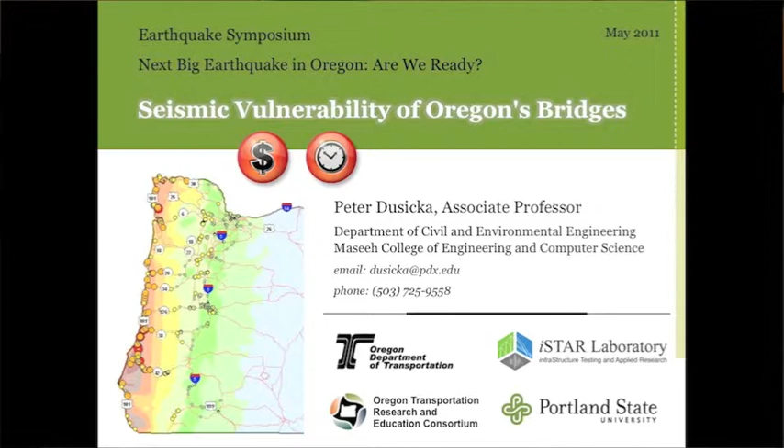Before I get going, I just want to make clear that even though I'm going to present some results of research that has been sponsored by various people, whatever I say is completely my opinion, and I do tend to be opinionated. So don't hold them responsible, hold me responsible. And I also have a series of graduate students and undergraduate students behind me who essentially did most of the work anyway.

All right, so I think in order for us to understand seismic vulnerability of bridges, we first need to understand the importance of bridges. So I'm putting up a slide of an example of the role that bridges play in our transportation system.

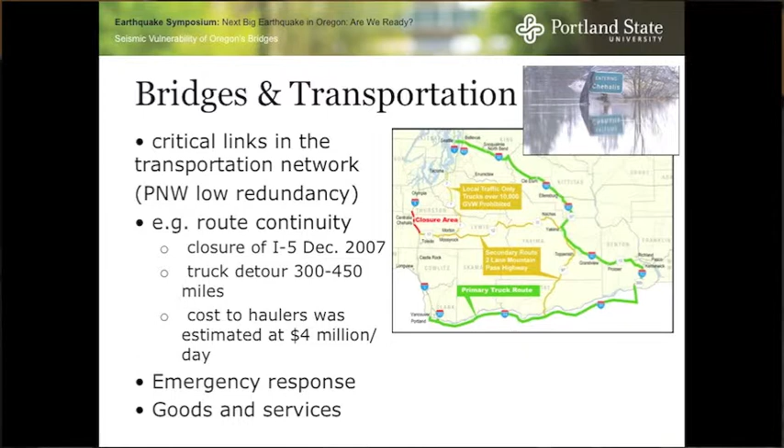This particular example is from about 4 years ago, when it wasn't a bridge that was down, but a short piece of a highway, I-5, just north of here, that was down due to a flood. Just to give you a sense of the lack of redundancy in our transportation network, the closest detour for moving goods up and down north to south between us and Seattle was about 300 to 450 mile detour, which was estimated to cause orders of magnitude about $4 million a day just for the truckers.

So if you imagine the bridges being points along a transportation network, then you quickly realize that if any one of those points go down, then depending on the redundancy of the network, you may or may not, and in the case of Pacific Northwest you typically do, cause damage not only to the bridge itself, but also to the society as a whole. And clearly, bridges are important for immediate emergency response, as well as goods and services well after the event.

So now, hopefully that we understand the importance of bridges, we can talk about the vulnerabilities. And you heard Scott talk about our gradual gain in knowledge in terms of the risk, right? So if we take the risk and we understand the fact that we've learned a lot over the last few decades, then what I'm going to talk about is, well, even if we knew what the risk was.

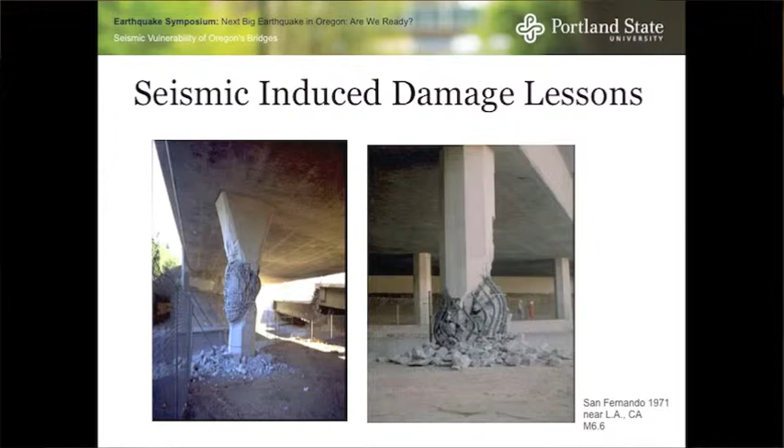But San Fernando was really a wake-up call, where a lot of the bridges got damaged in California, and it drew a few lessons for Caltrans, in that they essentially looked at the way that they design bridges, and all of a sudden there were a few lessons that they learned from it, and the seismic design has essentially steadily progressed from then on.

So some of the lessons that were learned: bridges are typically, or have been, designed for temperature expansion, right? They're fairly long structures, out in the elements, so they expand and contract, so you have these expansion joints in the bridges. Well, that earthquake really showed that if you can minimize the number of expansion joints in a bridge, the better off you are. They also learned that taller columns do better than shorter columns, and things like you end up putting steel into concrete to help it along.

The amount of steel and the position of that steel is actually really quite important. So from then on, we move on to other types of earthquakes, and being engineers, we're kind of reactionary, right? We essentially learn from every event.

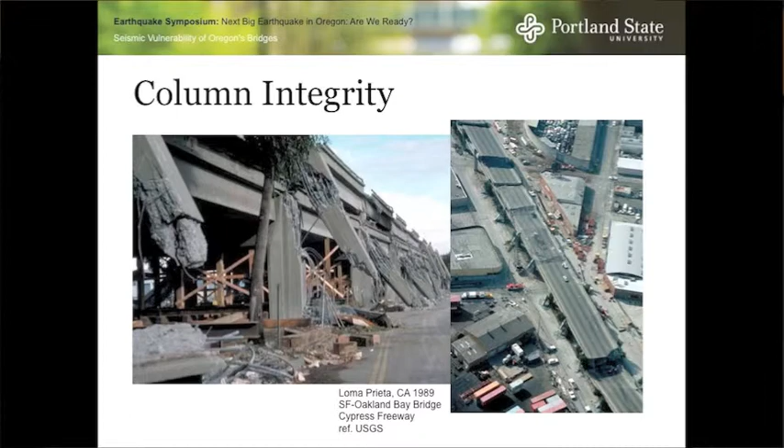But we go back to California in 1989, we had the Loma Prieta earthquake, and there we also had quite a bit of damage. We learned a lot about column integrity. Bridges tend to be non-redundant structures, meaning they have a few elements that resist things, unlike buildings that often have multiple load paths. So the column of a bridge tends to be quite important.

Knowing how to design that well really hasn't caught on until about the 90s. It took Caltrans about 10 years from 1971, another 10 years after that, to start instituting a retrofit program. So it wasn't really until the 1990s that they started retrofitting, but they've certainly learned a lot of lessons from their earthquakes.

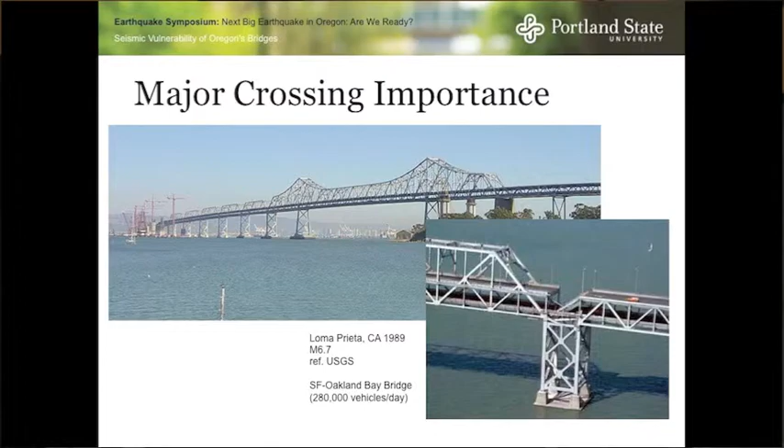They also learned quite a bit about signature bridges. Major bridges tend to be few and far between, so if one of them goes down, you have a major impact. In this case, the San Francisco-Oakland Bay Bridge, which carries on the order of 280,000 cars a day - if that's down, that obviously causes a little bit of a headache to the city.

As earthquakes continue to hit us, we as engineers who build stuff in the way of the earthquake have started to learn things. One of the things was, if we do have expansion joints in bridges, maybe we should make sure that they're long enough, because if the bridge happens to slide off that expansion joint, then results like this happen.

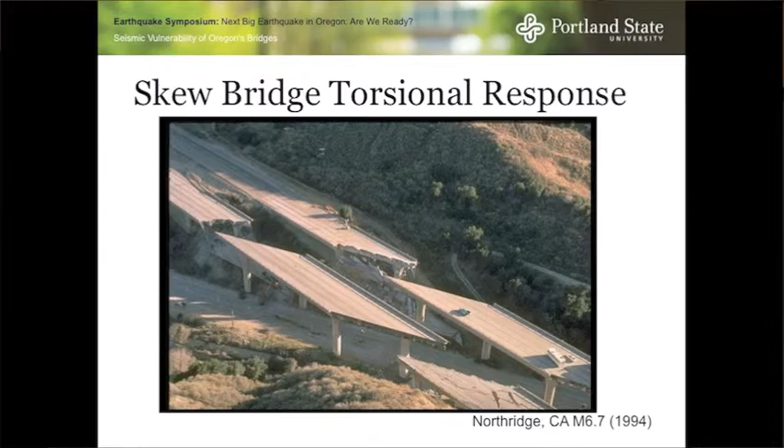We also learned things about torsional response, which is if you have an irregular structure, even if you hit it with an earthquake in just one direction, that structure responds in a different direction, just due to its own geometry. We learned that in Northridge, for example, where you have skew in bridges, which is where the bridge runs at an angle to whatever it's crossing.

We also learned through an earthquake in Japan that strength is not enough. It's not enough to build strong things when we talk about earthquakes. In fact, we now know that ductility is a lot more important - essentially the ability to absorb energy, not just to stand there and withstand it.

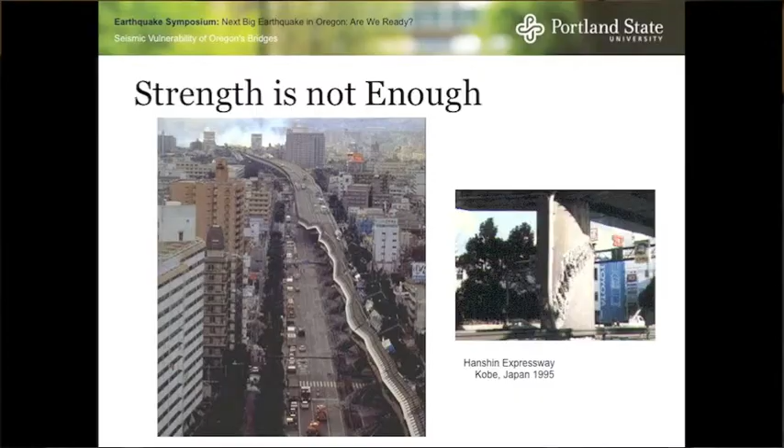And the Japanese didn't really learn that until essentially the Kobe earthquake in 1995. So what you see there is a fairly strong column, but all you need is 0.001 larger demand, and it's not strong enough anymore.

And we continue to learn these lessons, and unfortunately that just keeps going. So again, the importance of strength is not enough - the importance of understanding the structural behavior then becomes quite important.

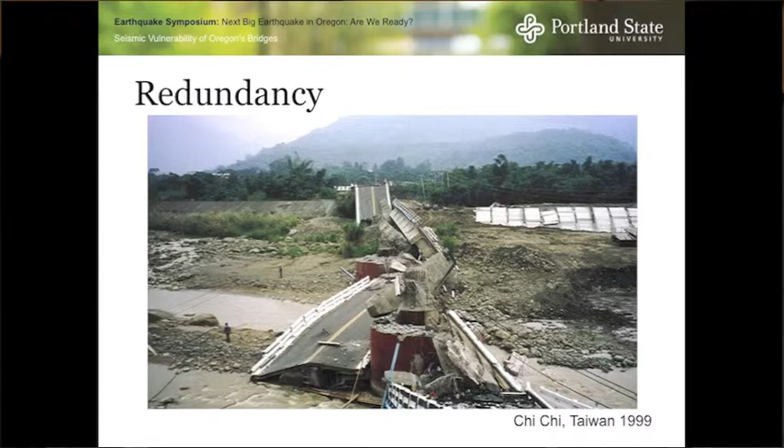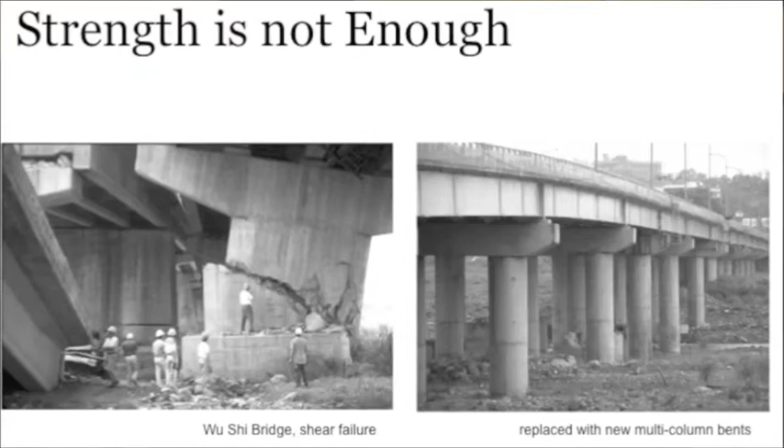The example you see there is actually from Taiwan, from the Chi-Chi earthquake. The bridge on the left is what it used to be - it was built more for strength than ductility. The bridge on the right is the replacement for it. So it may not look as intimidating, but it sure will act better in an earthquake, for example.

We also learned a lot about simply supported spans, i.e. having bridges that go from one support to the other, as opposed to having a bridge that's continuous over a lot of supports. It turns out that simply supported spans, especially if they don't have enough seat to sit on, don't particularly like being moved back and forth.

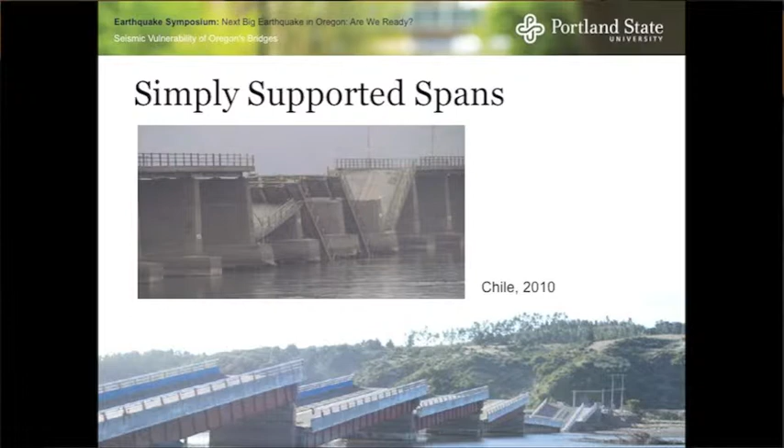There's an example from a recent earthquake in Chile, and we've seen that starting from 1964 in Alaska to essentially now. Closer to home, this is the Nisqually earthquake example. You don't need to have a collapse to cause a lot of damage. So we didn't actually have a bridge collapse in Washington, but there was a tremendous amount of damage.

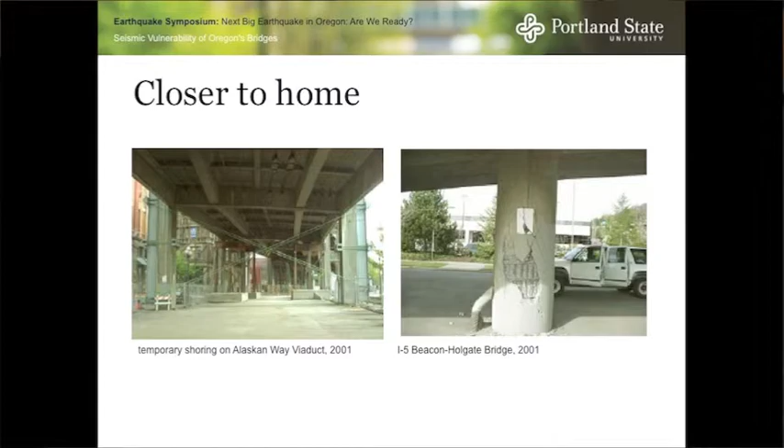This may not be common knowledge to non-engineers, but we don't build bridges, for example, to survive the earthquake and be functional. We achieve our design goal if we don't kill people. So even modern bridges are built to essentially not kill people, but that doesn't necessarily mean that you can use them afterwards.

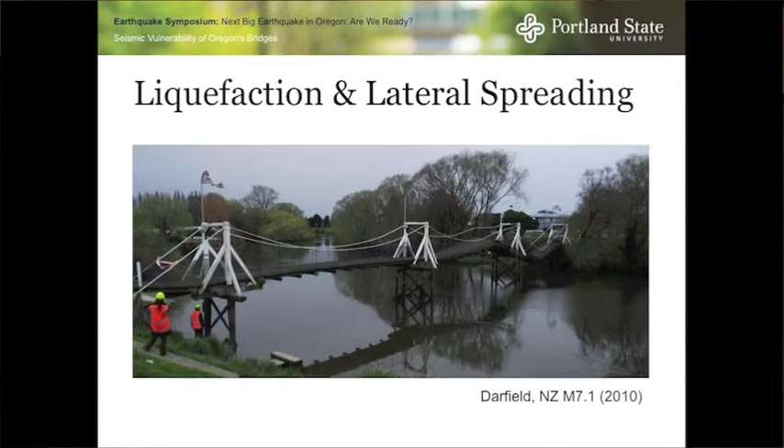Another problem is that even if we knew how to build the structures well above ground, it's also important to know what's below ground. Scott mentioned liquefaction as a major problem, and as part of liquefaction you get lateral spreading. So essentially, if you have a bridge and one side decides to go closer to the river and the other side doesn't want to go in the same direction, you get a problem like you see here. This is the pedestrian bridge in New Zealand following the Christchurch earthquake that used to be straight and didn't have any hills.

So how does that relate to us here? Essentially what that conveys is a picture of how we've learned a lot about bridge behavior. Leaving the risk aside, let's look at what that means for Oregon. If you look at the bridge inventory in Oregon, that graph shows on the x-axis the date at which a bridge was completed and the number of bridges built.

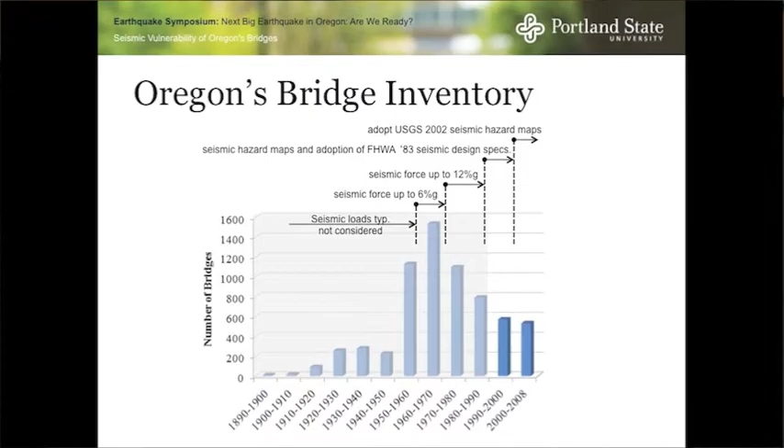You get a sense that the majority of our bridge infrastructure was built in the 60s, 70s, and 80s. If you think back about what I said regarding structural behavior of bridges, we didn't really know a heck of a lot about how to design properly yet. The little writing on top tries to indicate how much we knew and what we designed for in terms of earthquakes. It wasn't really until the 1990s that ODOT adopted fairly rigorous seismic design codes for bridges.

So that leaves the whole inventory on the left-hand side, shaded, of bridges that we own. You own them, I own them. They're there, they're being used, but unfortunately they were built before we knew what we know today with regard to designing effectively to resist earthquakes. So now we have them. Well, what does that mean?

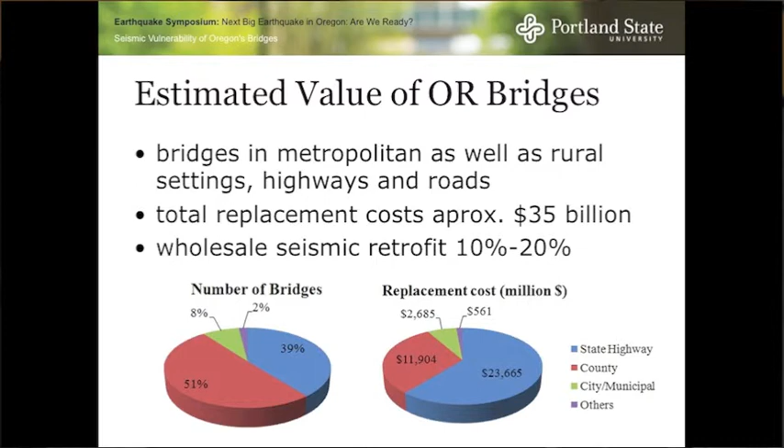If you look at the value invested in this infrastructure, the state of Oregon has on the order of 7,000 bridges or so. If you look at how they're divided between state-owned, county-owned, city, and miscellaneous, that's the first pie chart. About half of them by number are owned by county-type owners, but if you look at the value, the majority are actually ODOT-owned. So we're looking at about a $35 billion investment sitting there. If we decided to scrap all these bridges and build them again, we'd need about $35 billion to do it. So that's probably not going to happen.

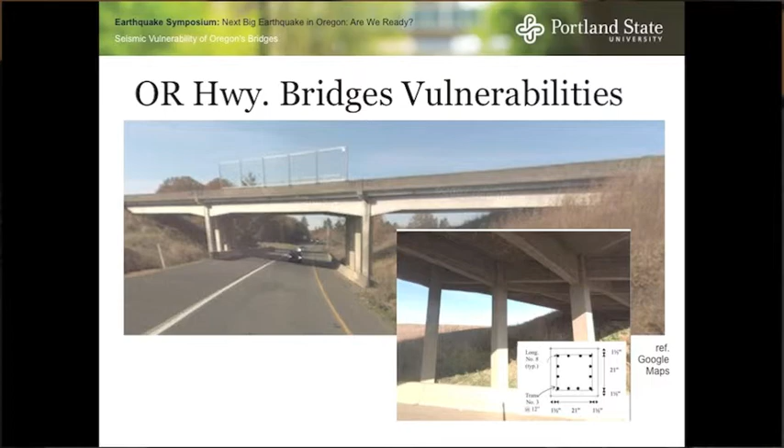So what are the vulnerabilities of bridges built in Oregon? California's way of building things is actually very different from Oregon's, so our bridges have their own vulnerabilities and idiosyncrasies. Our typical bridge looks something like this - a fairly standard highway overpass with multi-column supports. Those columns tend to be square and fairly slender.

Not at all what California builds - California builds round columns that are 6 to 8 foot diameter. The behavior, you may think square versus round, what's the big deal, but it actually has a fairly large impact on how you go about retrofitting these things.

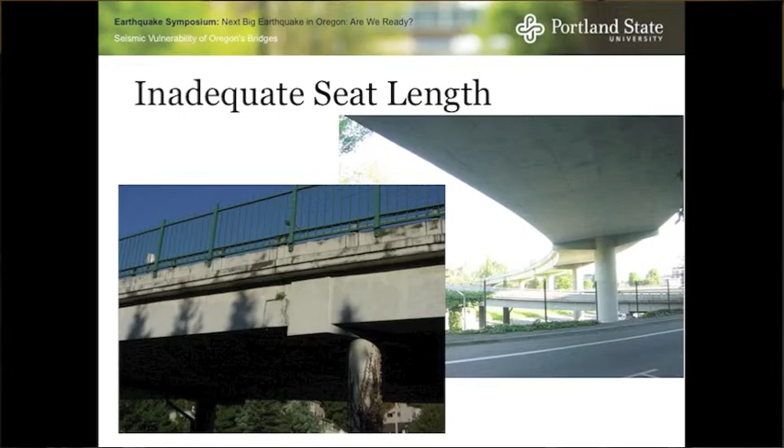We have a lot of inadequate bearings. This is an example, just on the other side of Hawthorne. If we have 4 inches for this bridge to be sitting on and be supported, and the earthquake comes in, it's not unheard of for it to move 6+ inches. So you'd need to be supported for another 2 inches up in the air, which probably isn't going to happen. That's inadequate seat length.

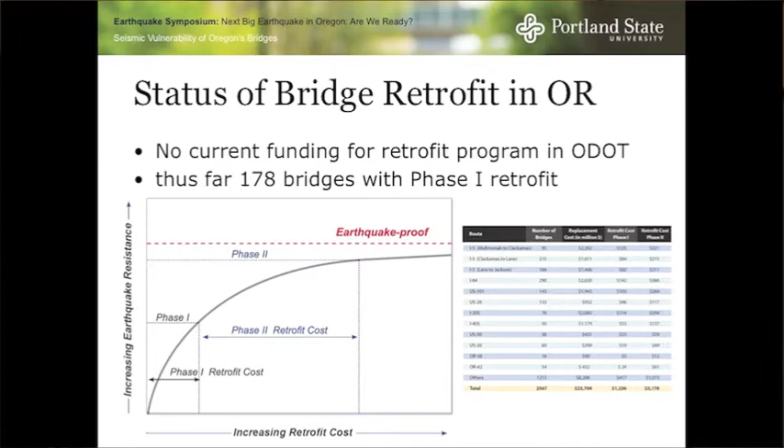So where are we within Oregon in terms of status for retrofit? Unlike California, who actually learned from their events and instituted a retrofit program, we as a state don't have one. There's no current funding for a retrofit program in ODOT. The bridge section has been doing an incredible job with nothing they've got, and they've been able to retrofit about 170 or so bridges out of about 2,600 that they own - a very small percentage.

They've divided the retrofit into phase 1 and phase 2. Phase 1 essentially is, let's keep the structure attached - so if there is an expansion joint, let's put restrainers on. I'll show you an example of those. Phase 2 is, let's actually worry about things like the column not breaking, or let's do something about this liquefaction potential that we have.

That graph is supposed to show the cost involved with the various retrofits. So there aren't actually any phase 2 retrofits in the state, which gives you a sense of urgency. There are some notable exceptions.

This is the Abernathy Bridge in Oregon City. That one's actually base isolated - essentially a method in which you help the structure by isolating it from the ground intentionally.

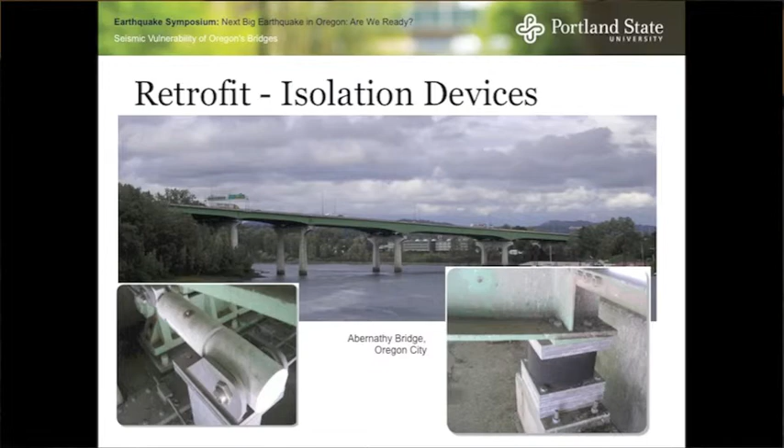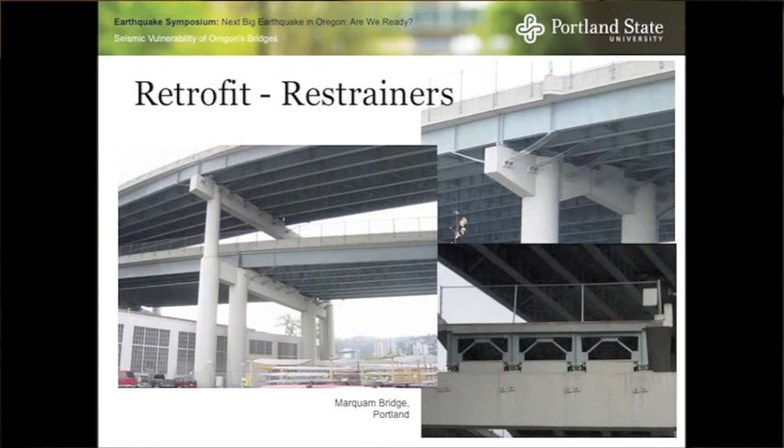There is the Marquam Bridge that has undergone a phase 1 retrofit. If you go for a walk around the river, have a look up at the bridge, and you'll see a whole bunch of cables. Essentially, the role of those cables is to hold the thing together when it starts shaking, so it doesn't fall down.

So since we know about these vulnerabilities, let's try to quantify some of them. We've done a little bit of research on looking at the vulnerability of the state inventory with regard to bridges. So we constructed some computer models, made some major assumptions, and ran some scenarios.

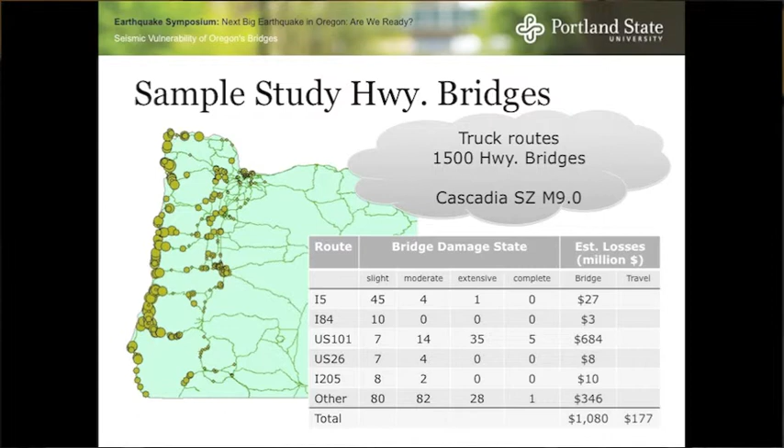An example of a scenario is this magnitude 9 that Scott mentioned, which essentially is a rip up and down the coast. We made some assumptions about the bridge inventory and came up with orders of magnitude - there's going to be about $1 billion worth of direct damage to the infrastructure itself, and some 170 or so million dollars loss due to traffic disruption. This model actually took into account the rerouting of traffic due to bridges being down.

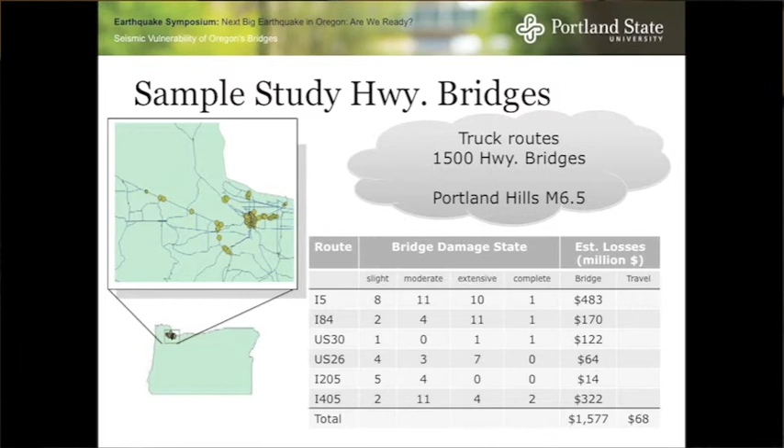We ran another scenario where we have a smaller magnitude earthquake that just happens to be built closer to a populated area - this would be the Portland Hills Fault. So a lot more concentrated, but just happens to be in the wrong place. So again, we're up in the $1.5 billion type of damage just from the bridges alone. And that's not accounting for major crossings, right?

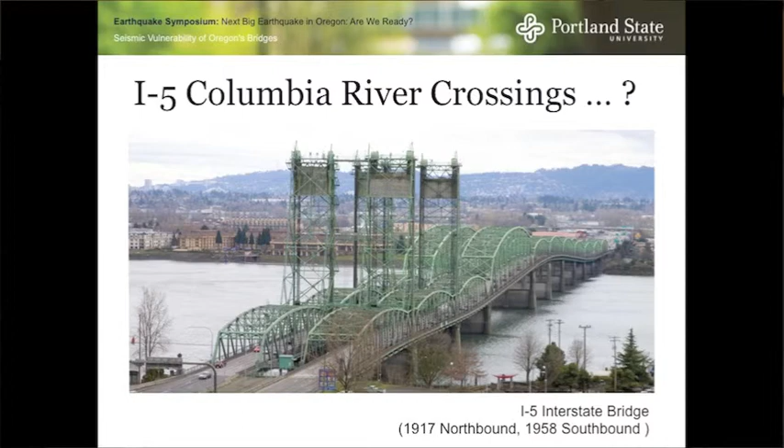So how about the interstate bridge? Yeah, that will probably get damaged. That actually wasn't part of the study.

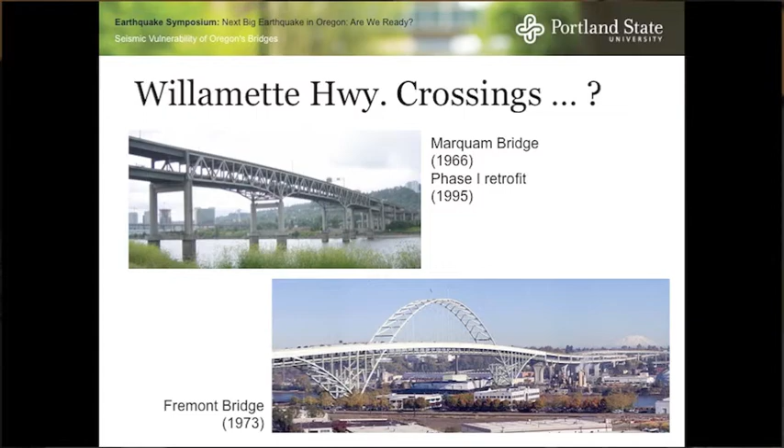How about the Willamette crossings? The Marquam Bridge, built 1966, did get a phase 1 retrofit in 1995, so that might actually be doing better than others. The Fremont Bridge, 1973, a good year by the way, built - might have issues. Again, those bridges are kind of beasts of their own, and they require actually detailed study to know exactly what would happen. But we certainly can take a wild guess at what could happen just based on the type of construction, the way that they've detailed it.

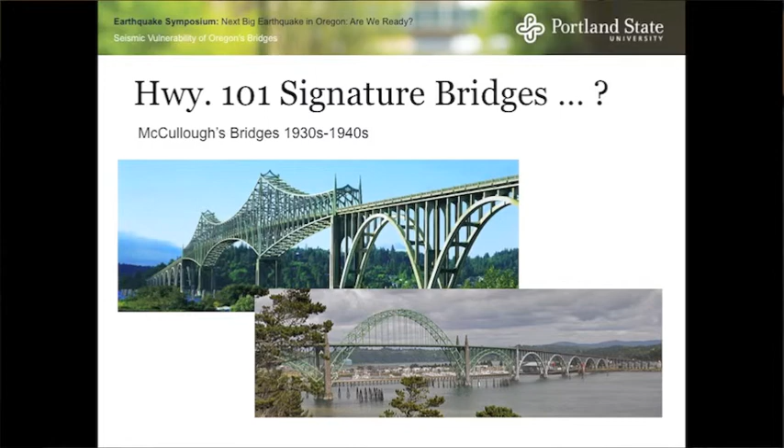How about the signature bridges up and down 101? Now these happen to be a lot closer to where the big earthquake - that 9.0 subduction - is going to be. And they were built in the 30s, 40s, right? So they're very beautiful bridges, but certainly vulnerable.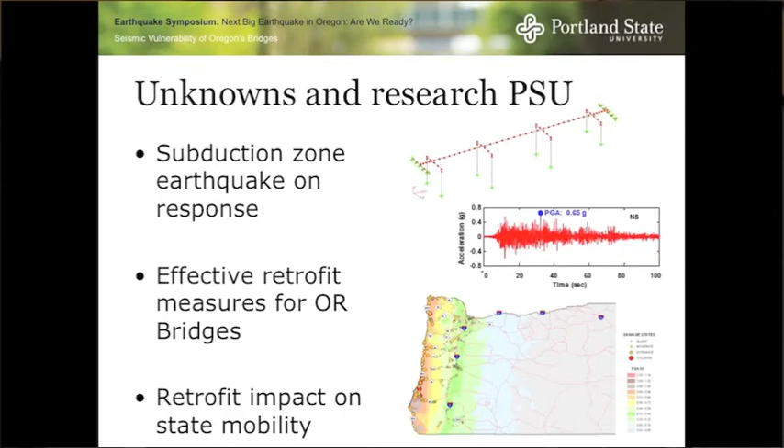So we're addressing some of these unknowns with our research at Portland State University. Some of the questions we want to answer that we don't quite have answers for yet: we've got this subduction zone earthquake, Scott told you that it's going to last probably more than a minute, whereas most of the stuff that we design for these days is based on California-based experience, where the earthquake lasts maybe 20, if you're lucky 30 seconds, of which maybe 10 seconds is actually strong motion. So what does that mean in terms of response of some of these vulnerable bridges? That's some of the questions we're trying to answer at Portland State.

What is an effective retrofit for bridges that are built in Oregon as opposed to this California type construction? And what is an impact of retrofit on our mobility?

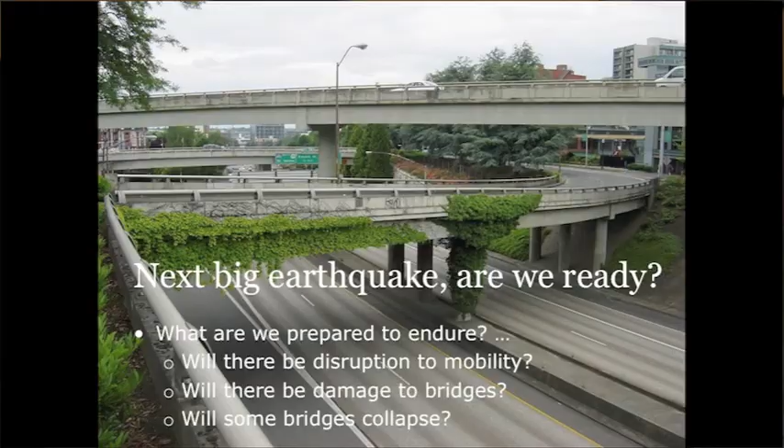So next big earthquake, are we ready? Well, I'm here to pose more questions than answers, hopefully. But it really depends on what we're ready to endure. Will there be disruption to mobility? I think so. Will there be damage to bridges? Absolutely. Will some bridges collapse? Yeah, I think so. So to what extent are you willing to live with this? It depends.

Hopefully that gives you an overview of the vulnerability state of bridges. Like I said, unfortunately, there's no retrofit program in place, but we certainly have a lot of investment in our infrastructure.